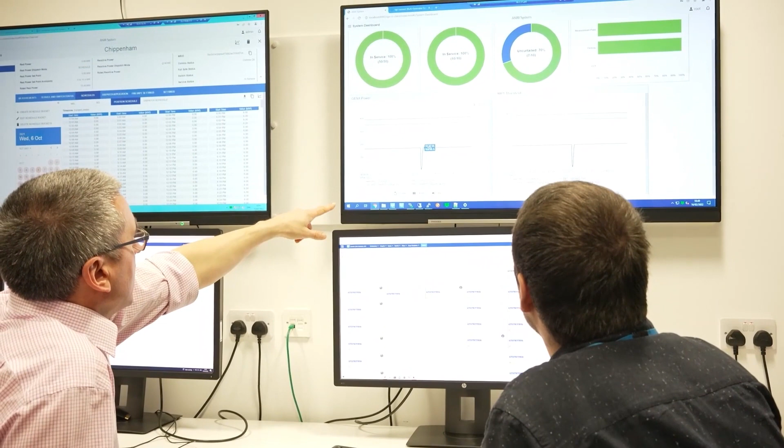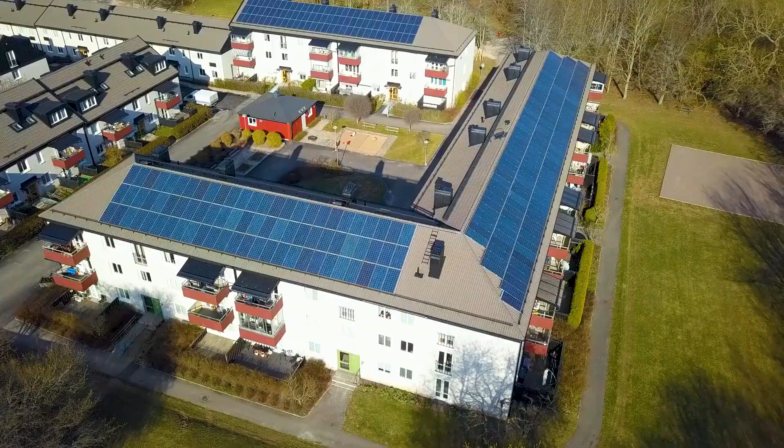Smarter Grid Solutions, SGS, is a leading global provider of distributed energy resource management systems, known as DERMS, the technology that enables power distribution utilities and distributed energy resource DER operators to meet clean energy goals. Electric grid operators throughout the world are experiencing an increasingly complex mix of new decentralized power generation and clean energy resources. These changes require additional monitoring, control, and other advanced functionality beyond the scope of typical ADMS control systems. In this video, we focus on the peak shaving capabilities of StrataGrid, SGS's utility DERMS software.

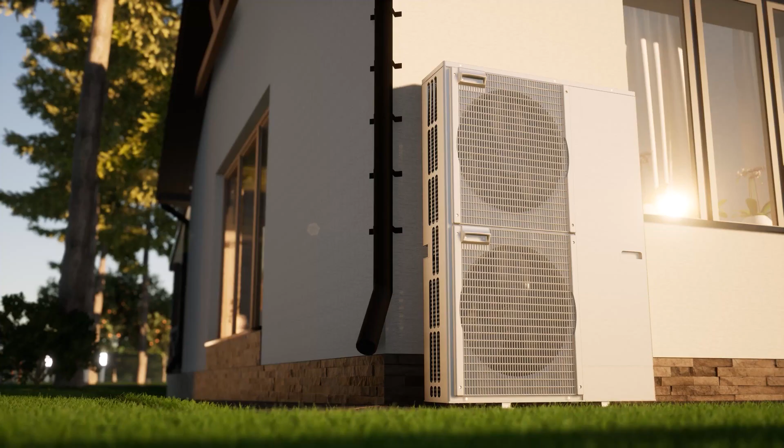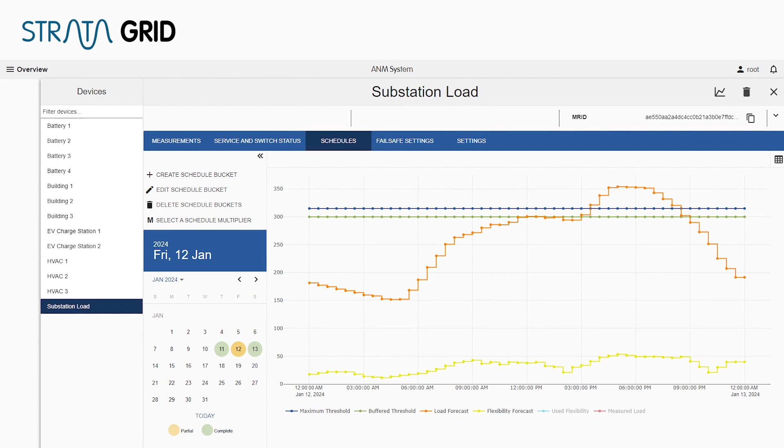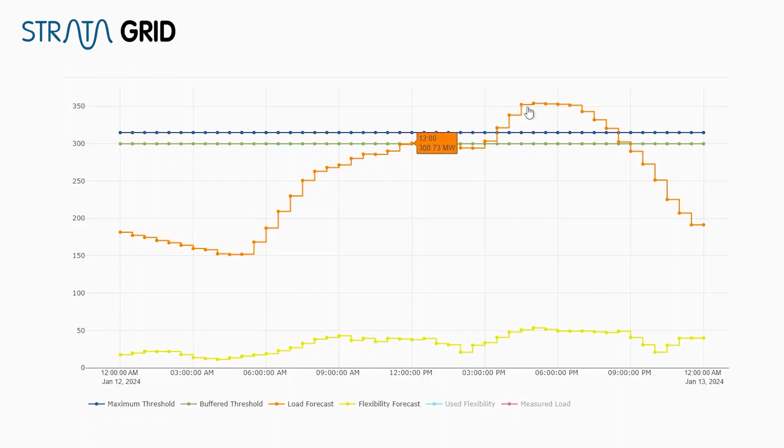It's an especially hot day, and operators are closely monitoring weather, forecasted load, and current grid conditions. Load will likely exceed system capacity today. The control room operators will use StrataGrid to forecast and mitigate the peak load, as opposed to simply cutting off power to customers. The operator uses this display, updated in real time, to determine when to initiate a demand response event. In this display, the operator can see the forecasted load, along with the available DER flexibility. In this case, the measured load is lower than the forecasted load, so an event can be started later than was originally anticipated.

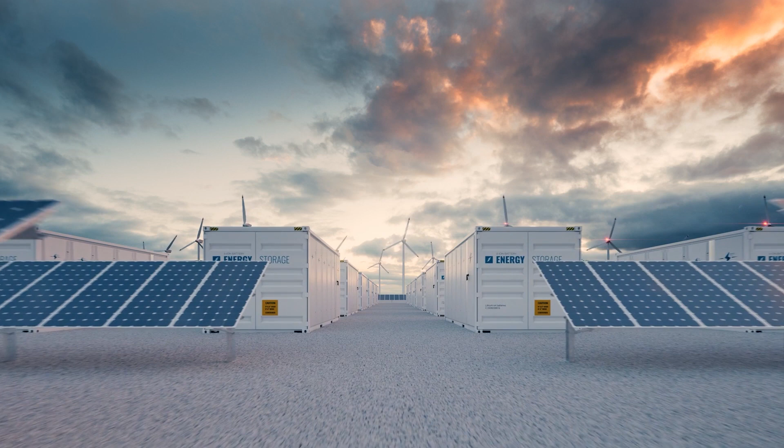The operator initiates an event by specifying target threshold, buffer amount, and expected duration, along with a strategy for DER participation. StrataGrid will bring DERs online and give them set points as needed to ensure the measured load remains beneath the threshold value. The buffer value is used to provide enough notice and ramp time to bring resources online. The operator can also dynamically add and remove resource groups from participation before starting the event. StrataGrid has pre-configurable rules for defining the order in which DERs and groups participate in an event.

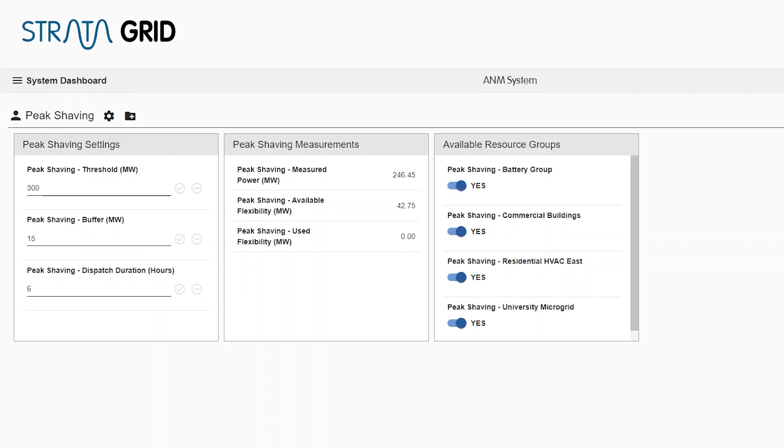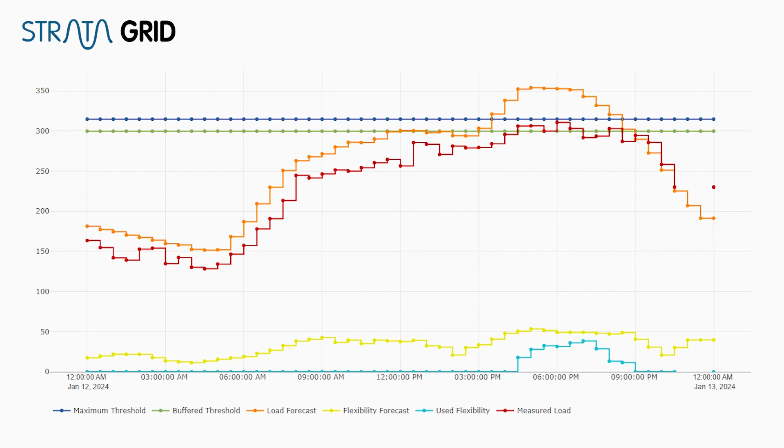On the load monitoring page, we can see in the graph that the measured load was kept beneath the threshold once the operator initiated the event. We can also see how much of the forecasted load flexibility was used during this event. It's possible to see a tabular view of the event, as well as detail on how individual DERs performed during the event. While this event was shown as manually initiated by an operator, StrataGrid can also automate and optimize the same behavior.

Okay, so just to recap the video, our product StrataGrid allows our customers to manage their expected peak by utilizing day-ahead load forecasting to understand when and how severe their peak load will be. Active resource management of these controllable devices and enabling groups of devices allows customers to manage and reduce an anticipated system peak.

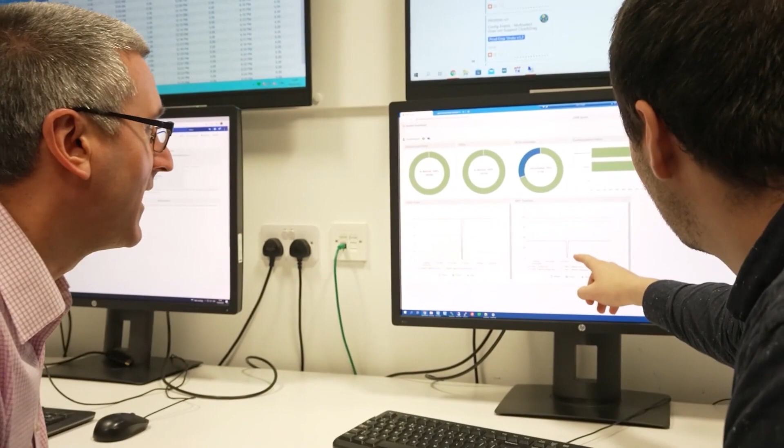Okay, in this next video, we will show feeder load management capabilities of StrataGrid. Smarter Grid Solutions, SGS, is a leading global provider of distributed energy resource management systems, known as DERMS, the technology that enables power distribution utilities and distributed energy resource DER operators to meet clean energy goals.

Electric grid operators throughout the world are experiencing an increasingly complex mix of new decentralized power generation and clean energy resources. These changes require additional monitoring, control, and other advanced functionality beyond the scope of typical ADMS control systems. In this video, we focus on feeder load management capabilities of StrataGrid, SGS's utility DERMS software.

Here, we demonstrate manual responses to a potential feeder overload. In operation, the response would often be automated due to the need for fast response to potentially multiple affected feeders. The control room operator gets a notification that capacity has exceeded an alarm threshold for a feeder. This screen is the StrataGrid event display.

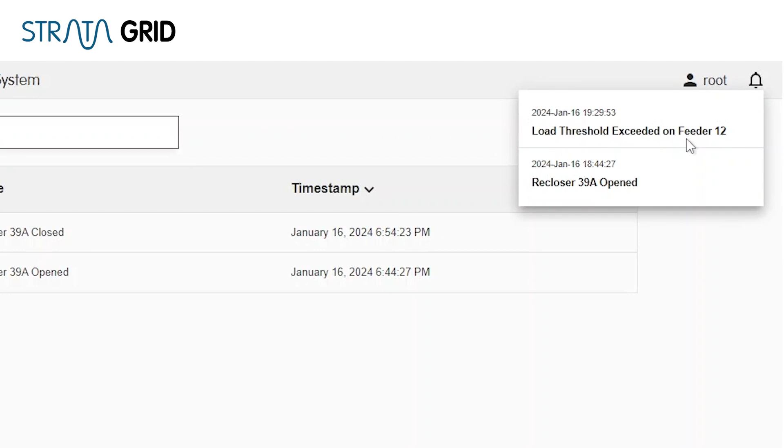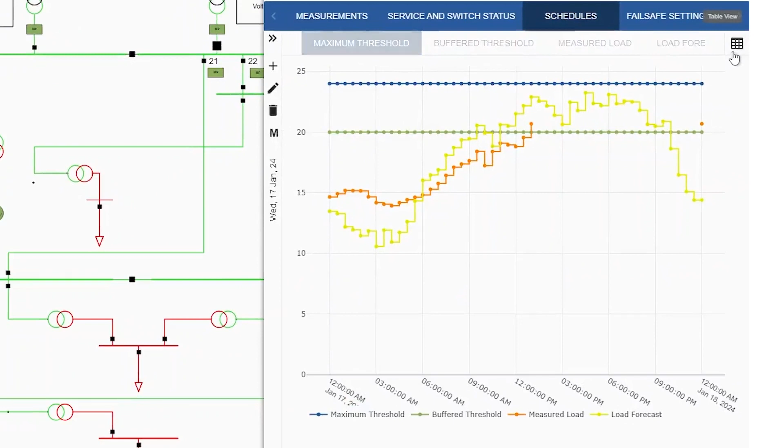Events and notifications can also be sent to the ADMS, EMS, SCADA over an industrial standard communication protocol or by email. From the display, the operator navigates to the feeder via the corresponding substation one-line diagram for context. From the one-line diagram display, the operator drills down to a real-time trend graph showing the current feeder loading versus threshold.

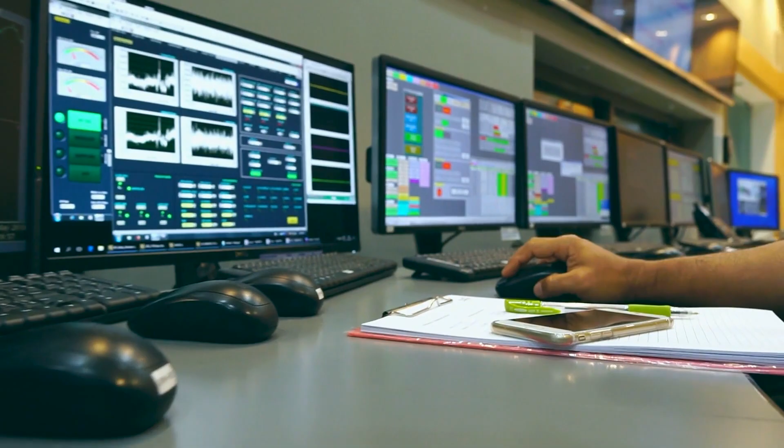The operator then initiates a load reduction event for the feeder, specifying a max threshold and buffer value. This is nearly identical to a system-wide peak shaving event, but targeted at a specific feeder. In our real-time monitoring, we can see in the graph that the feeder load was kept beneath the feeder rating after the start of the event.

StrataGrid manages DERs automatically once the initial instruction is set, bringing them online and giving them set points as needed to ensure the feeder load is kept beneath the threshold. Automation of this functionality is either managed directly by StrataGrid's automatic load management application or invoked via an API from the utility ADMS. All direct management of DERs occurs within the StrataGrid software.

So our platform allows customers to forecast their feeder constraints, and this helps to determine where these constraints are happening and how severe they are, essentially, to understand what's going on in your network. And based on these constraints, the system can determine what DERs to deploy to reduce that feeder load that you've identified and interface with any behind-the-meter resources as well.

Users can also review past events by looking at past data retroactively to understand different trends and mitigation tactics to relieve their feeder constraints.

Lastly, I want to take this opportunity to formally announce the partnership between Smarter Grid Solutions and Generac. Generac's Concerto platform will be offered as an integrated module of SGS's StrataGrid utility DERMS platform to coordinate responses from DER aggregators. This system extends SGS's ability to support customers in aggregating and coordinating across DER and demand response programs by rapidly expanding the portfolio of pre-integrated DER program providers.